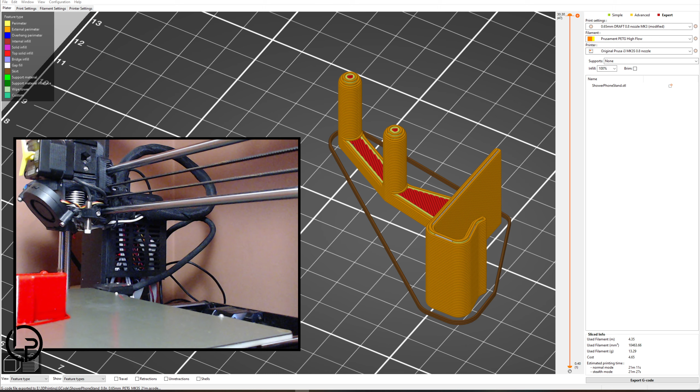Yay, and we're back. I've been able to test it now. See. Without just filming my crotch.

Hi, and we're back. The first version wasn't 100%.

One thing I found, which isn't a huge surprise. Close the door. No huge surprise, but this is probably not stable enough.

We'll need some curves. Now it's probably strong enough. I'll test that too. And let's test if the new width is good for the tray.

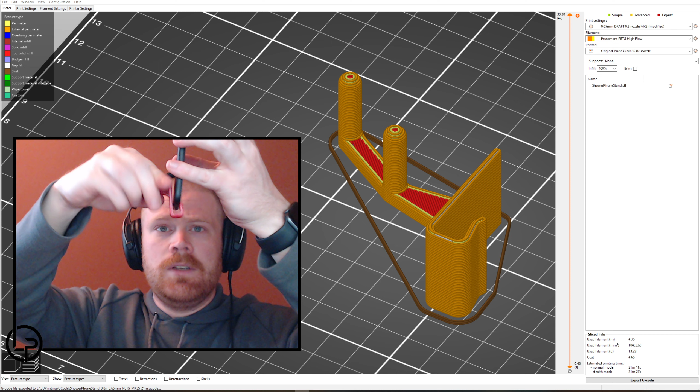That's very good. It could even be a tiny bit deeper. The gap could be even bigger. But this feels very nice. Yeah, even a tiny bit bigger.

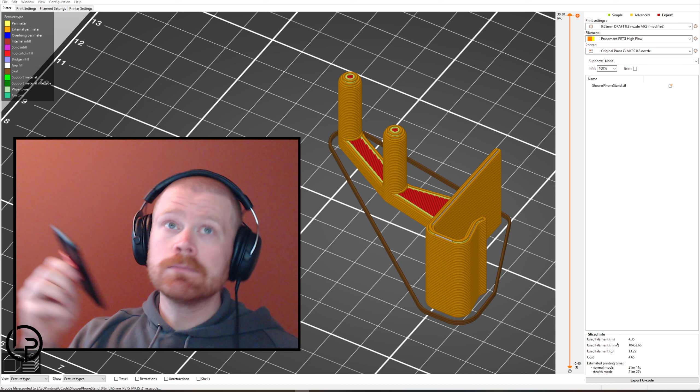At least if my girlfriend's phone is going to work too. Yeah, that's stuck there now. That works. Happy start, but yeah, I'll make it even a tiny bit bigger.

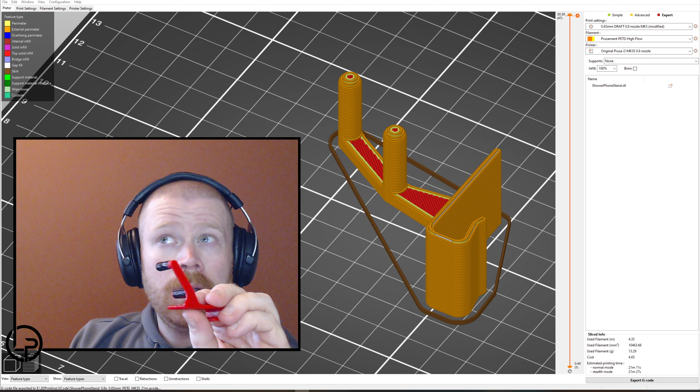But the problem here - if I don't remember what that kind of tape is called in English - the insulation tape stuff, if we use that, it gets enough traction to hold it up.

But I like that. But it's too unstable, so it will try to turn around. Which makes me think that we should try to redesign the holder part to basically just clamps.

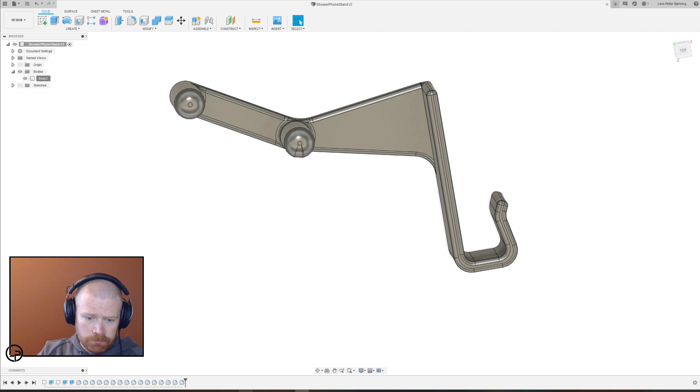Let's see. So if we now design it instead of these just rods. Let's see who's trying to get a hold of, no one.

If we try to change it to basically 3 curved clamps, which we can clamp onto the rod, I think that's more - there's no doubt it's more stable.

And yeah, it's more stable, and it's not an easier design, but I'm pretty sure it'll be better. So let's try.

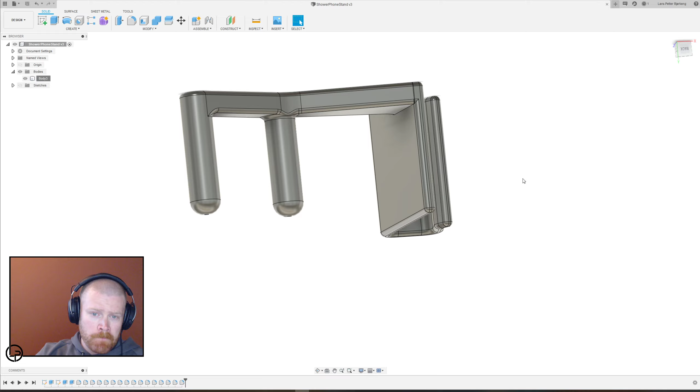Let's see. In that case, first of all, let's change this to 8.2. There we go, that should be okay now. That's done, and let's save it.

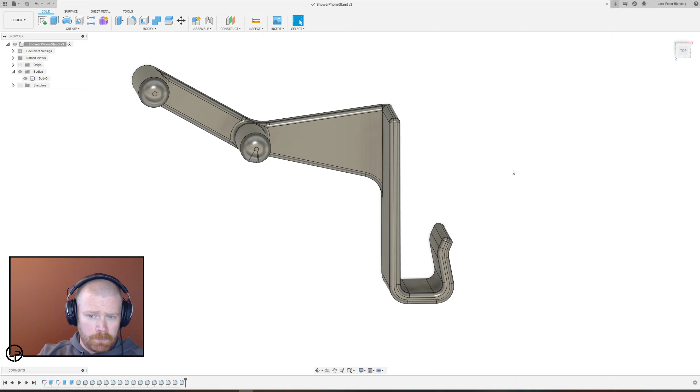There we go. And then the next part. I'd like to just go all the way back here, basically. Yeah, and start from the top here and create basically half moons that we can just clamp onto it.

And those can even be stuck almost straight to the edge here, or just out, but that won't print well. If I try to make it just out from the back,

there we'll have to have a lot of support and stuff, which is okay. We can just make support. Let's try that.

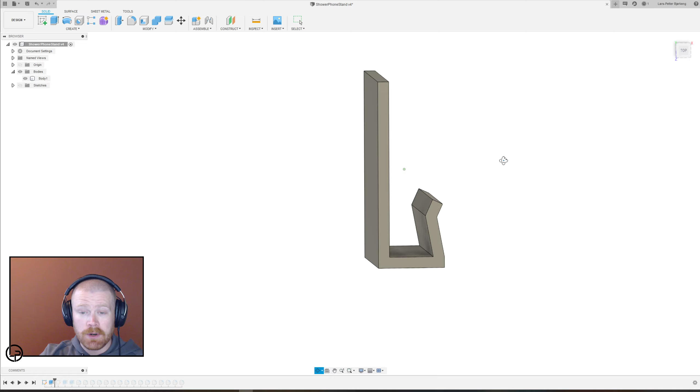The support for the 0.8 millimeter nozzle is horrible to remove, but who cares? Let's try. Yeah, let's start up here.

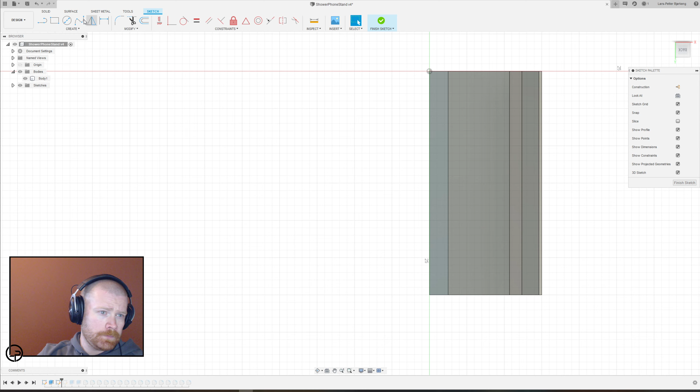If we then just make, start with a circle with the diameter of the aluminum rods minus 1 millimeter. So it's a tiny bit smaller than the rod, so it should clamp a bit at minus 1 millimeter.

There we go. And then another circle. That should be basically - how thick should that be? 2 millimeters, let's use the thickness we've used.

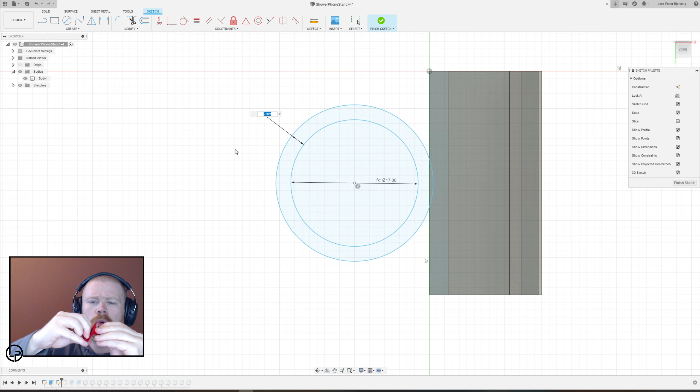This will flex a bit, won't it? Oh, it doesn't flex a lot. No, but that flexes - that's the old one. This flexes a tiny bit.

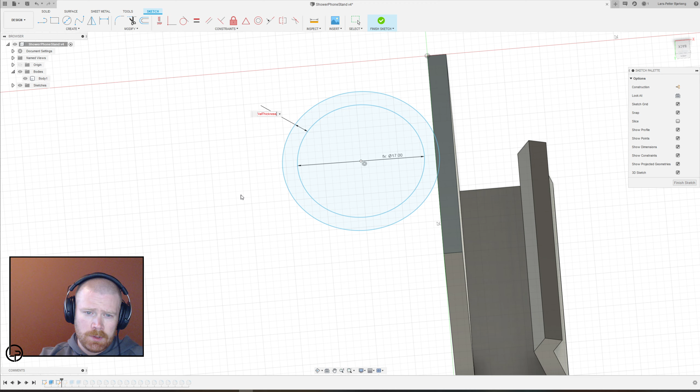So this might actually not be enough. Is it 2.5 here? Let's see. VarThickness - yeah, that's 2.5.

That has to be enough, doesn't it? Let's try that, let's try using 2.5 millimeters there. And then, because now if we're going to print this standing up like this, we'll have to have some support underneath whatever we add here.

But anyway, this is okay, this is much easier. So let's - an easy design will usually be better than a complicated one, if you can get away with it.

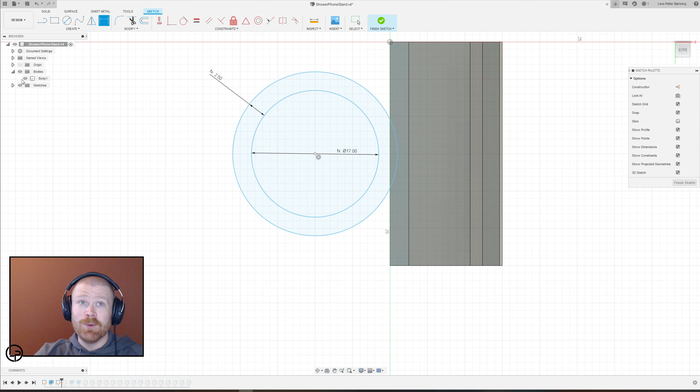So let's see, but we need to make an opening here. And the opening needs to be like almost all of this. So something like that. Not that much, let's see.

That should be the diameter of the aluminum divided by 2. That's like - oh no.

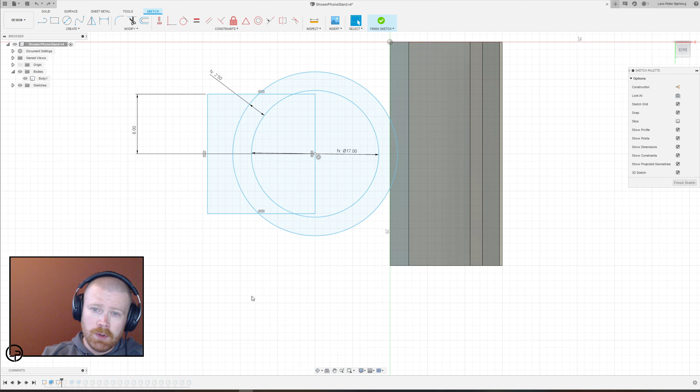First let's define that this should be in the middle, which is the tray width divided by 2. No, that's fixed in the middle. The center of the ring is fixed in the middle of the back here.

That needs to be the diameter of the rod divided by 2 minus 1, maybe. That's 8, so that's good. And that needs to be the same.

Divided by 2 minus 1. But that might not be enough. Let's give it minus 1.5, like that, because that will then clamp onto the pipe a bit. If we now just extrude, see the sketch.

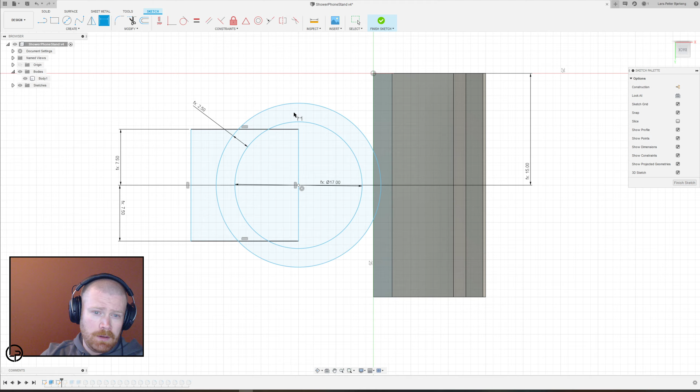We now just extrude that downwards like that. This part will clamp onto the pipe, although it might not be big enough. The difference between the diameter of this one and the diameter of the pipe might not be big enough, so it might not clamp down hard enough.

But we can just try. 1 millimeter isn't a lot of flex. PETG could be strong enough for that. How much is a millimeter here? That's not a lot here, but it is quite a lot here. So here, for the back of this, 1 millimeter is quite a bit.

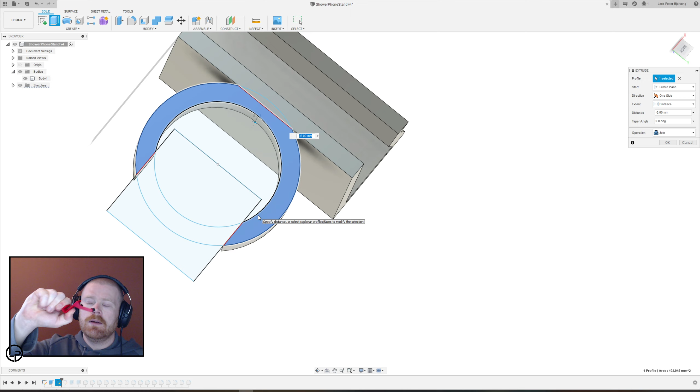But this thing flexes very easily. It probably has just to do with the direction of the print. But 1 millimeter, if we remember, 1 millimeter for that in between here was huge. So let's try this.

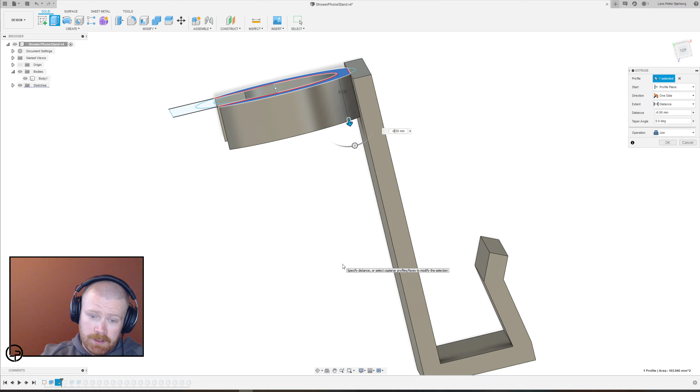Something like that, and 6 millimeters of height. No, let's make it 5 millimeters of height. And then we can repeat that one a couple of times.

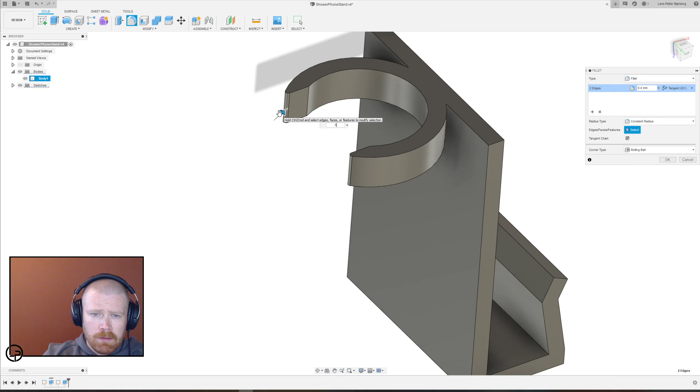Delete all of the features down here. And first of all, let's fillet this a bit. Okay, maybe we can make it 1 millimeter. Yeah, something like that, because then it should be possible to push it in.

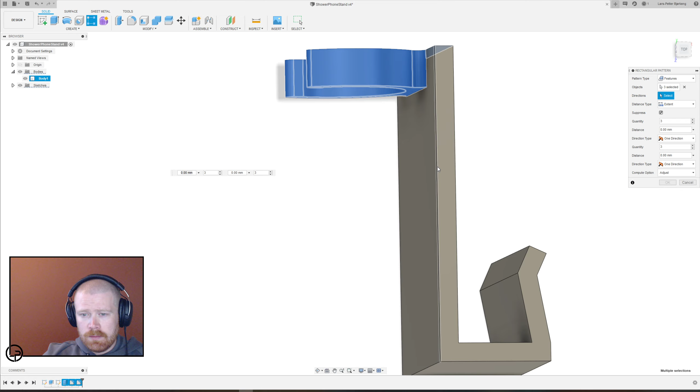Isn't it? Is it here? Add rectangle. There you go. Pattern, rectangular pattern, those three down, 3 of them downwards. Like that should probably be the strongest, right? Or let's just do 3. There we go.

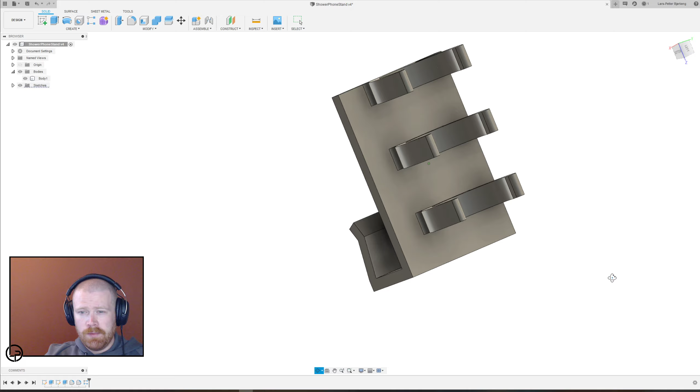Maybe that's overkill. I'm really scared of the support here. But we'll just have to try. And then let's fillet the rest of it.

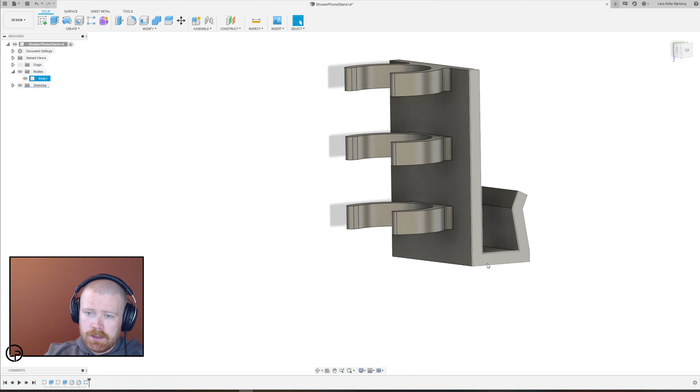Oh, we might as well just go ahead with that 1 millimeter. Not really happy that I deleted all the fillets here now.

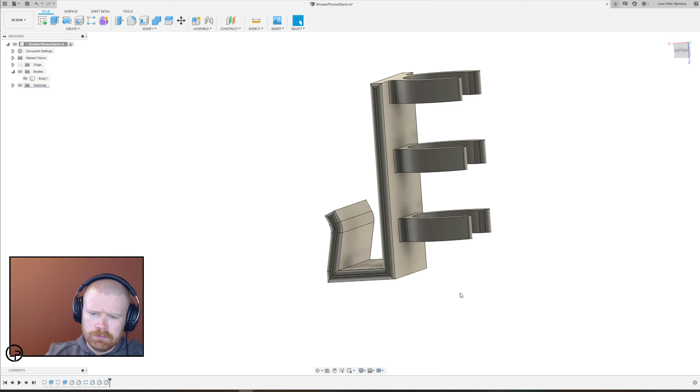No, we should do this the other way around. You and you, like that. Oh, 3 millimeters is nice. You, and you, probably like 4 millimeters. Yep.

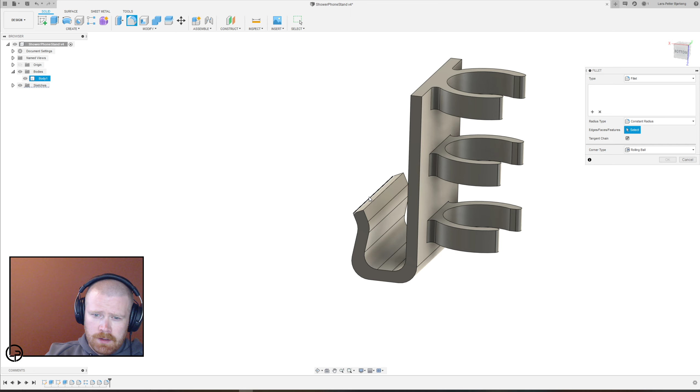And you, smooth it out. And then you and you. Same as you guys, millimeter probably. Yeah, like that. And then we can do the edges 1 millimeter, and that should be okay.

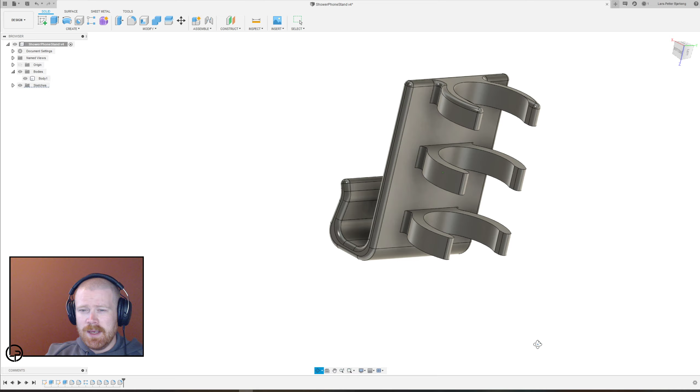Something like that. Maybe even do these guys. If it's able to... no. 0.1, 0.2? No.

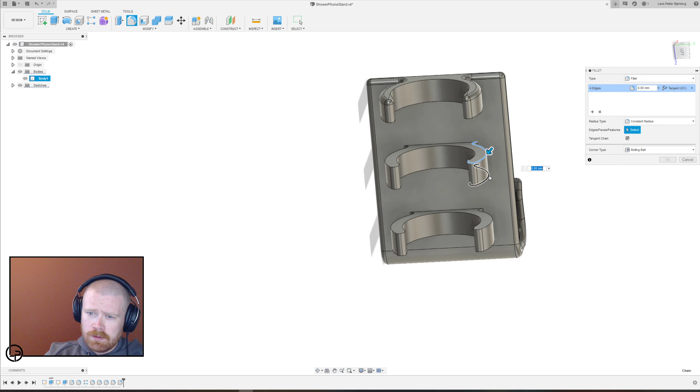What about if we try just these edges? Will it be happy with that? That's okay. Let's try that. That doesn't look too bad, but it looks like something that'll take a lot more time to print.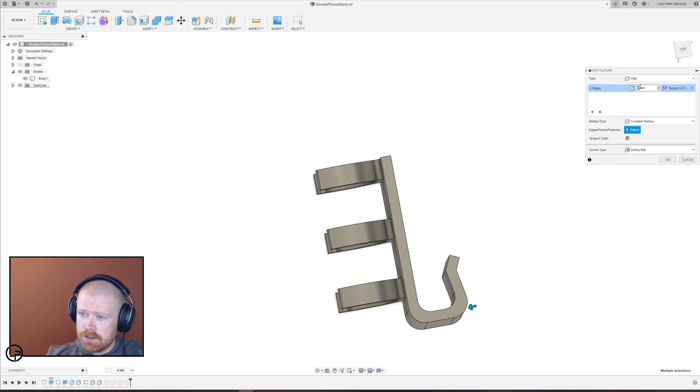And this, let's see, not that one. That one should be 5mm instead. Yeah, that's better, smoother.

Let's export that and see what we get.

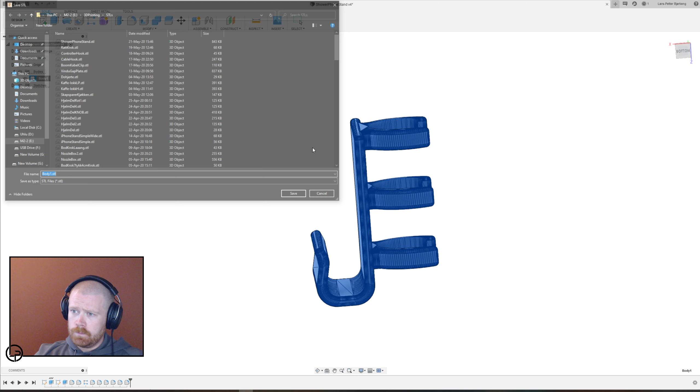That'll probably be pretty difficult to print. Well, not difficult to print, but it won't be as smooth as the other one. Need to place it on like that. I think that's the best way to place it.

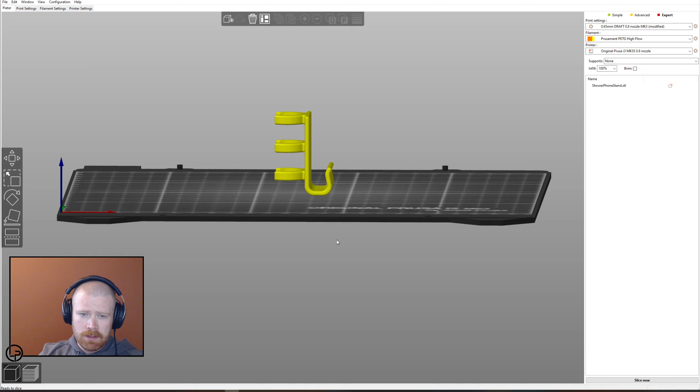There's no good way of doing this without the support, and I'd rather have support between these guys than on this plate here, because that's where the phone will be.

Let's try just to add support everywhere. Nice. Yeah, because that'll take half an hour, and these supports will be hell to get out of there. Not very happy about that.

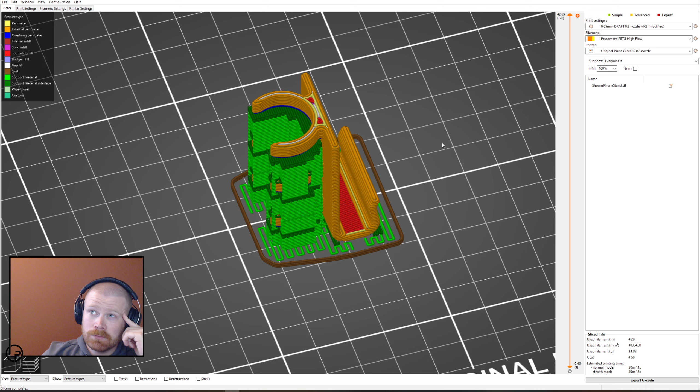I'm not sure there's a good way of doing this without supports at all.

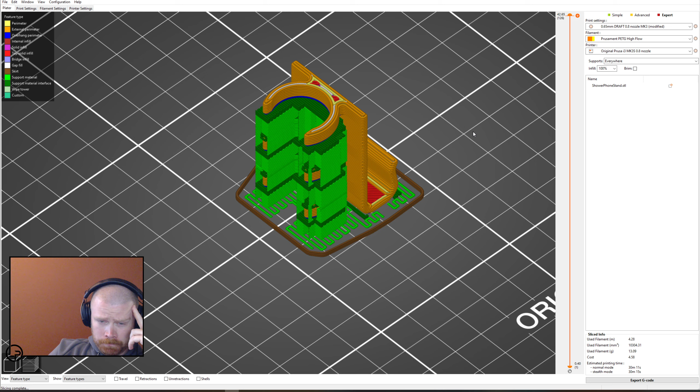We probably could do something with these, to avoid supports. Well, first of all, if we drop the first one down and only have two, we get less support.

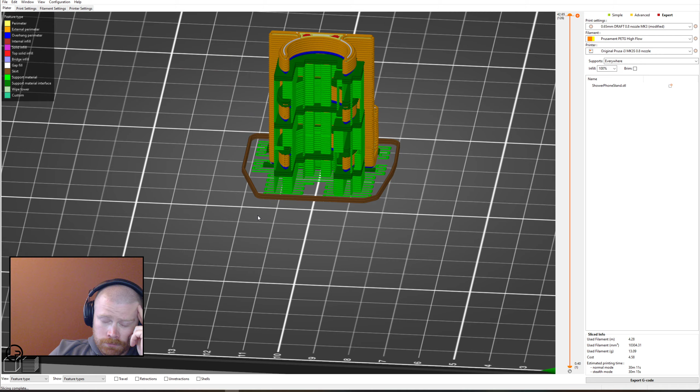Yeah, let's start with that. Ah, damn it! But then I'll have to suppress the first one, which probably won't be easy, because if I suppress that one, I won't be able to.

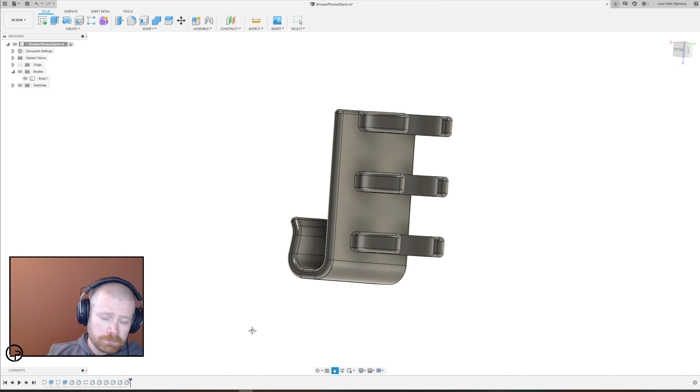I'll just move the sketch. Redefine sketch plane. No, wait. If I construct a plane here, that is like down there, then...

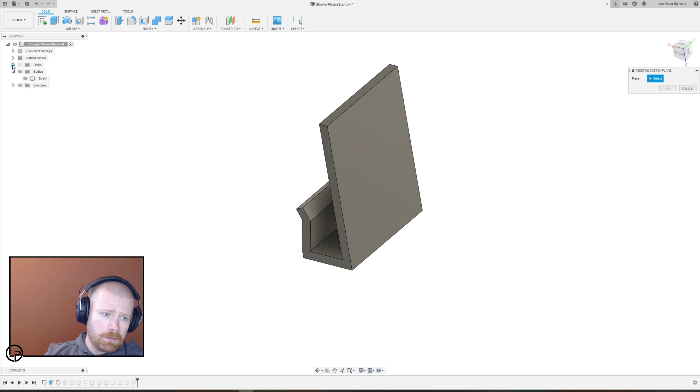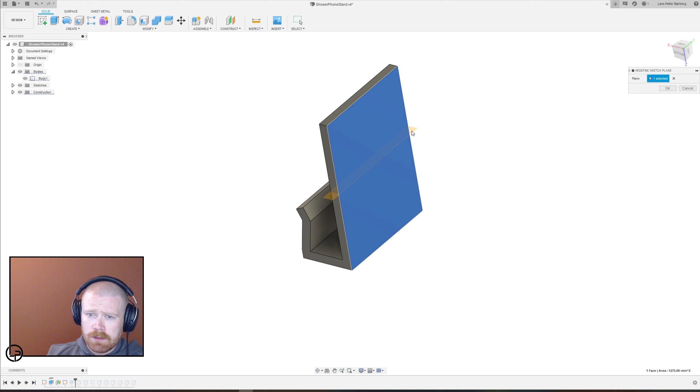What? Of course, I need to do that over here. So go down 15, or let's go down 20. Then sketch plane to this. No. Come on. To that plane. There we go.

Then that's okay, but then we'll need to do something smart here. 2, please. Not 30, rather 15.

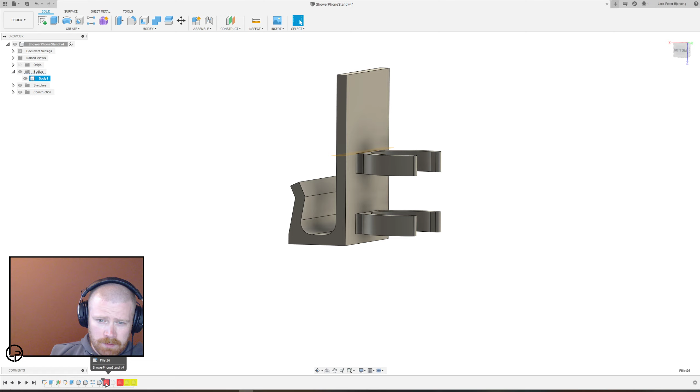Like that. I'm not sure that'll be okay with the filleting. No. What are you trying to do there? There's that one. So let's make it even a bit shorter. Like that. What now? What? Problem.

Can't make that 5? What about 4? 5? Okay, oh, that's okay. Just have 4. Yeah, okay, so it's too close still. I'm okay with that. Just have 4 there.

That one's okay. What are you trying to do? Okay, it's probably with the old ones. Just delete that feature. Yeah, okay.

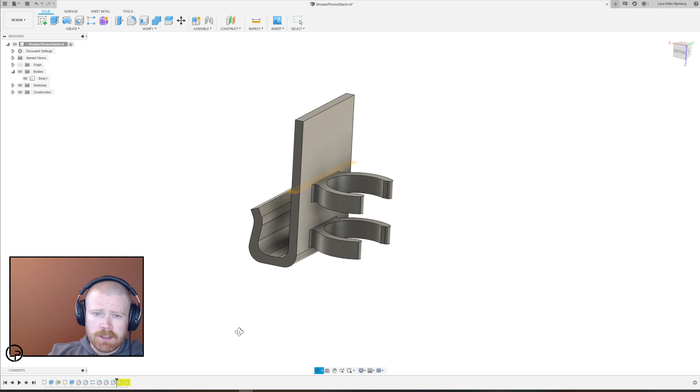Let's fillet first. First try to... that's these probably. 1mm. Hooray. Done. Okay.

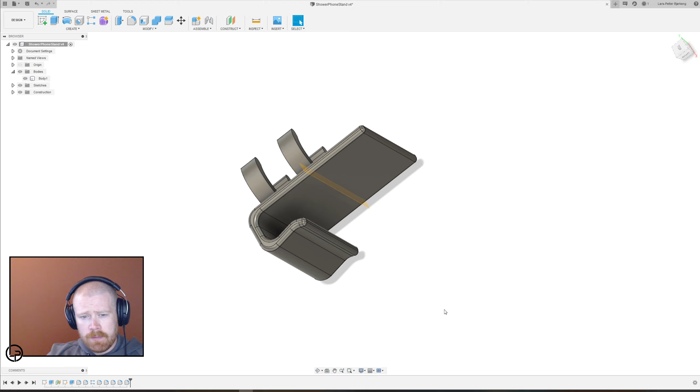That one, and that one. Great. Then we can try to help out these guys. Outer edges. Yep.

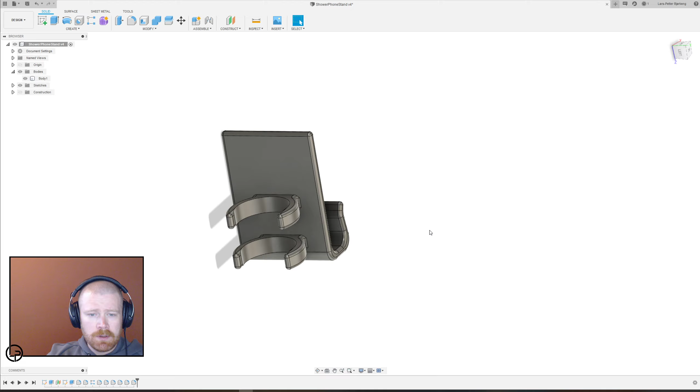Come on, you can calculate this. Thank you. That'll be significantly less support.

So let's try to make that instead. Right? Yeah. Save it.

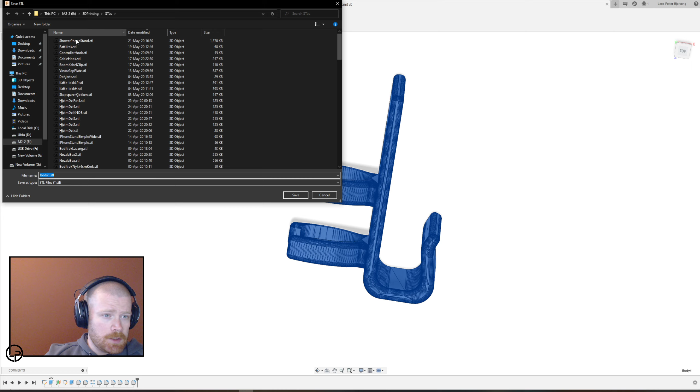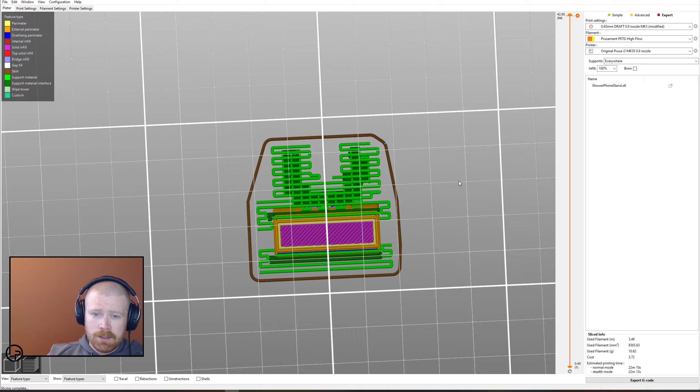New plan, STL, and export the STL as the same. And try to import it in here and see how this goes. Yeah, that's much less support. 22 minutes. That should be okay.

Let's try to print that. Export. Prepare the printer for printing. Here we go. And into print. It starts heating up.

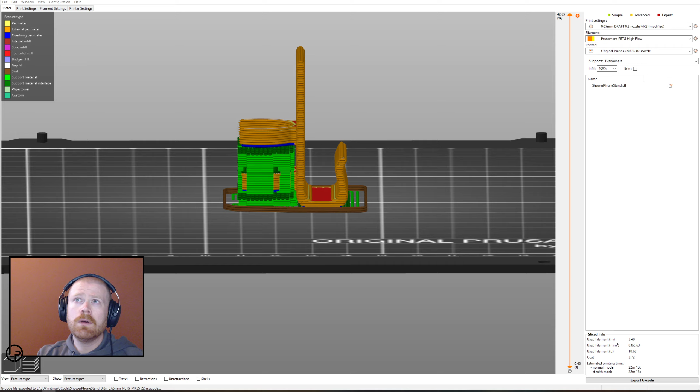So what's the most interesting view here? Like that.

Then we'll try to print that version, hopefully the last one, and I'll test it when it's done printing. I'll leave the stream running while it's printing, but I'll test it after it's done, and we'll see.

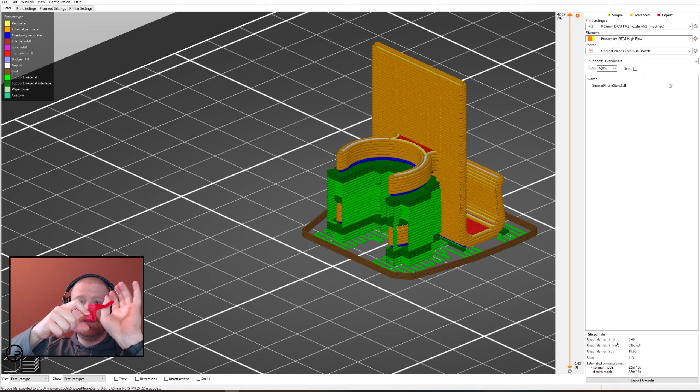I think that this one will work, the old one. I will also try this one, the previous one, now and see. I don't think it seemed too unstable, and with the arm longer here, it will stay up better, but it will also swing more, I think. It will swing around the aluminium rods more, so I'm not happy about that.

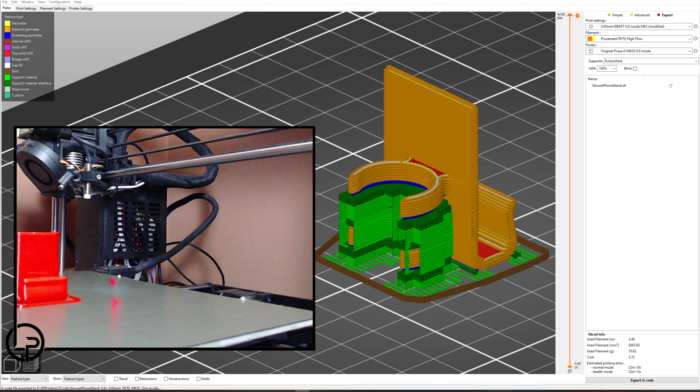There we go. See that something happened here.

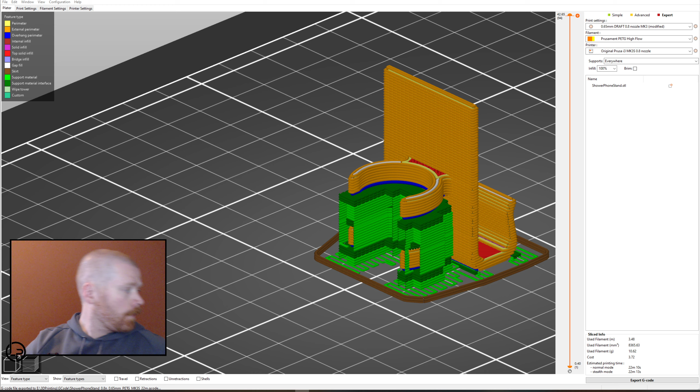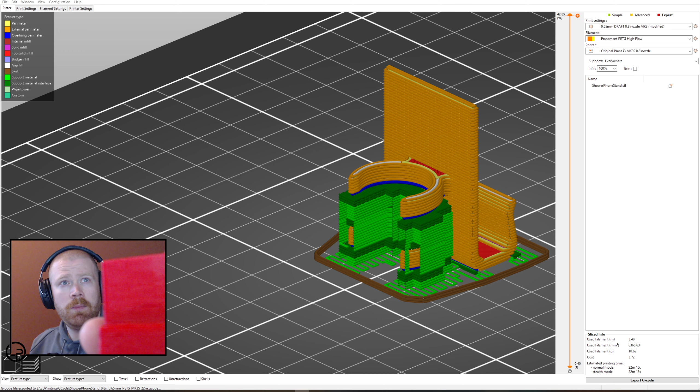Let's see. This did not come out 100%. Something's going on here. See, at the area where the top hook is placed, the back of the tray has got some inconsistency. That's okay.

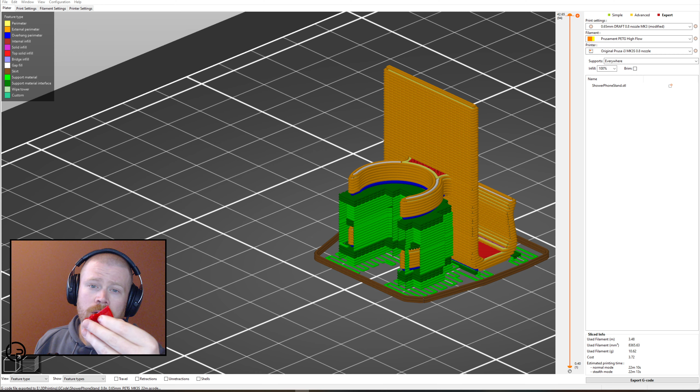And then get off these horrible 0.8 supports. If this seems, when I get these off, if it seems like it will work in the shower, I'll print a new one with a standard 0.4 nozzle.

Yeah, these supports are basically impossible to get off. I'll rip the whole thing apart before I get these supports off. Well, this was no good idea.

So that's a lesson to you. If you're going to use a 0.8 millimeter nozzle, don't print any supports.

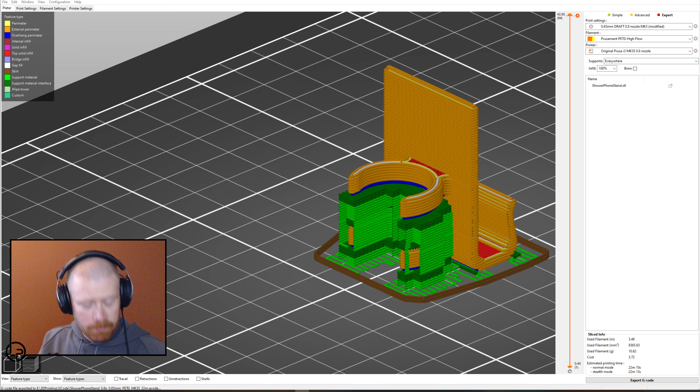Well, they are coming off part of it. Let's see. Not like that, not straight to my crotch. See here. Like this.

Getting into ASMR range with the microphone, but oh yeah, there I broke it. Of course.

There we go. But I can still try to hook this one up in the shower and see if it looks like it works. Because this can probably be used and tested at least.

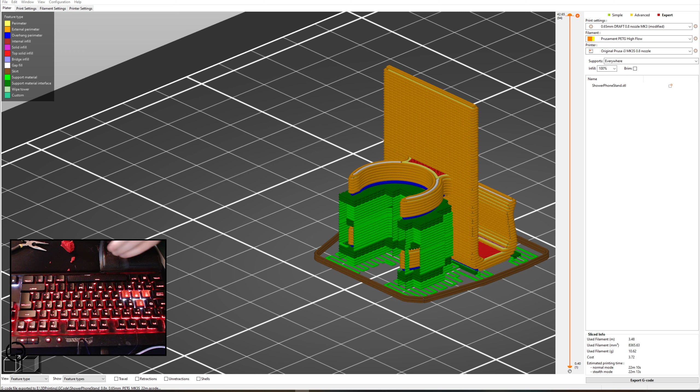No, I should have known better. Let's see if we try to slice it for the standard 0.4 millimeter nozzle or even 0.25.

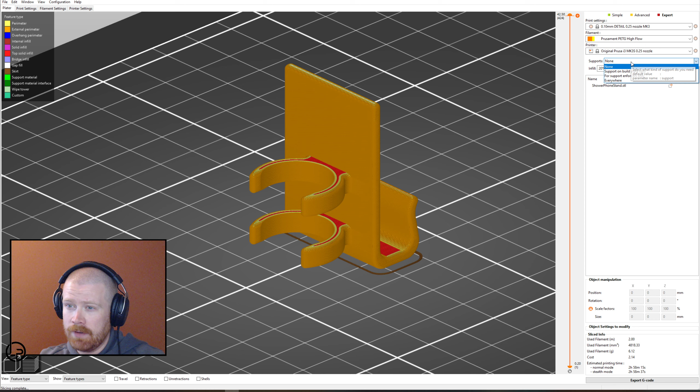We do it like this. Exactly, that's a couple of hours, and if we enable supports, we're at 3.5 hours. But these supports are really easy to take off.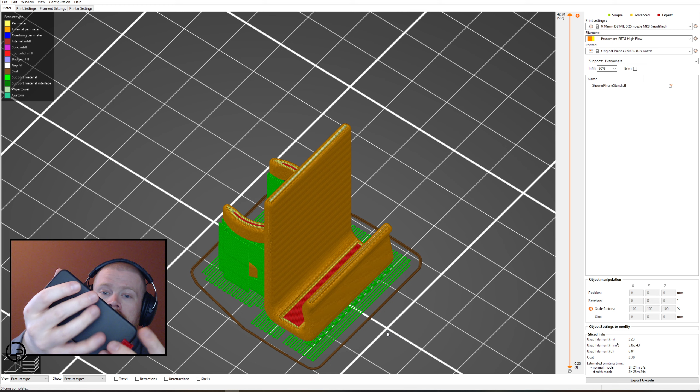And let's see if the foam fits into this. That's very nice. It's stuck enough that I'm not scared it'll fall out. But it's not strong enough to... yeah, it is just strong enough to hold. No, that's pretty much perfect. Then we're not using too much force, and it won't fall out like this, right?

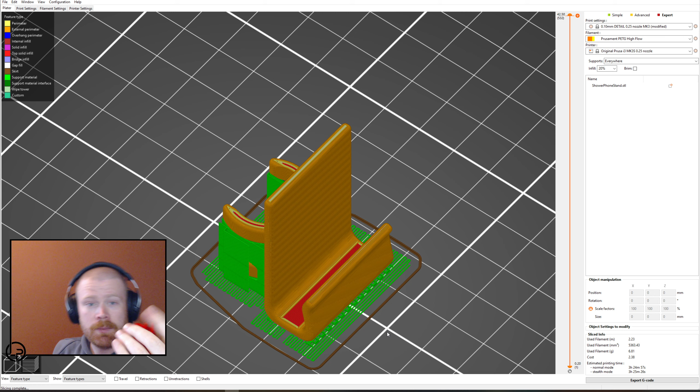Ooh, bless me. So it won't fall out like this, but it's very easy to get in and out. So I think that's actually perfect for the size of this.

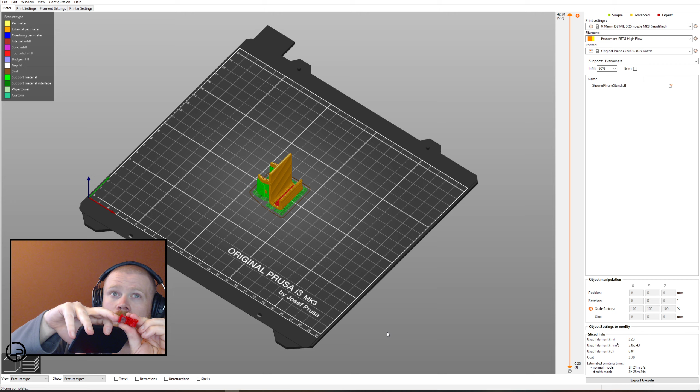With a smaller nozzle, I think I will actually make the gap here a bit smaller, because with a smaller nozzle the surface will be more even. You can't see it because it focuses on my head, but the surface will be more even, so in practice the gap will be bigger with a smaller nozzle, because now it's a bit smaller really than the actual model.

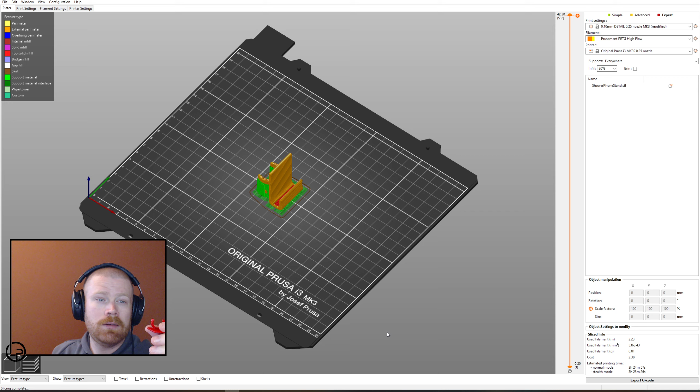Yeah, I think that'll do it. That's 3 hours of modeling and printing. I think that'll do it for the day. But I'll try this one out, and I'll go try it right now, and come back and let you know if it looks okay.

Yeah, that hangs perfectly in there. So this with two brackets like this, and some support that doesn't totally break, it should be good.